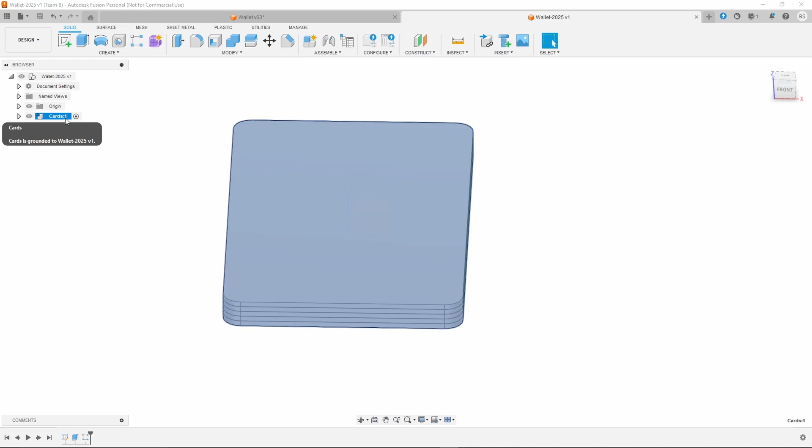You'll notice in Fusion 360 when a component is selected with a radio button, it looks solid. But when it's not selected and there's another component that's been selected, it's semi-transparent. That's to tell you visually that you're not editing that particular object or affecting it very much, but you can still use it.

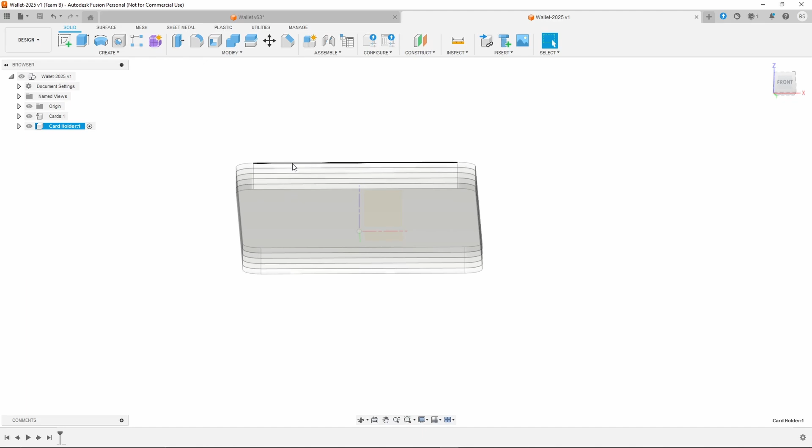So for instance, here's the cards that I'm going to make that's going to fit my card holder. And so I can design around it by selecting one of the surfaces of the card. See how it's got this little hashtag underneath it, means it's been selected. And so when I go and sketch on it, but I'm doing it in card holder, I'm actually using another component to draw a new component with.

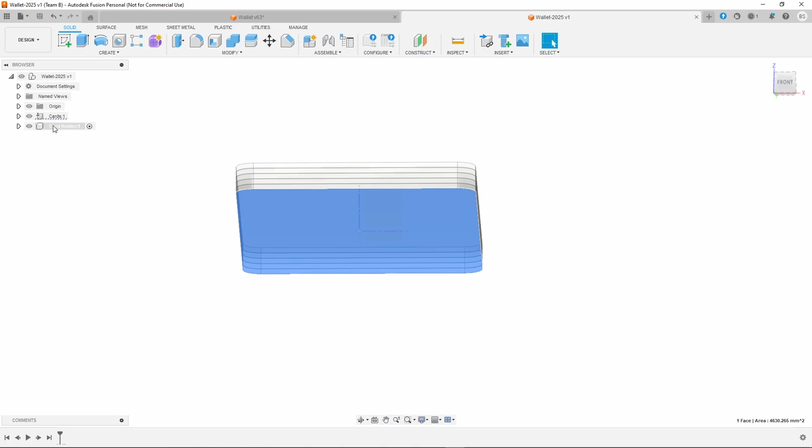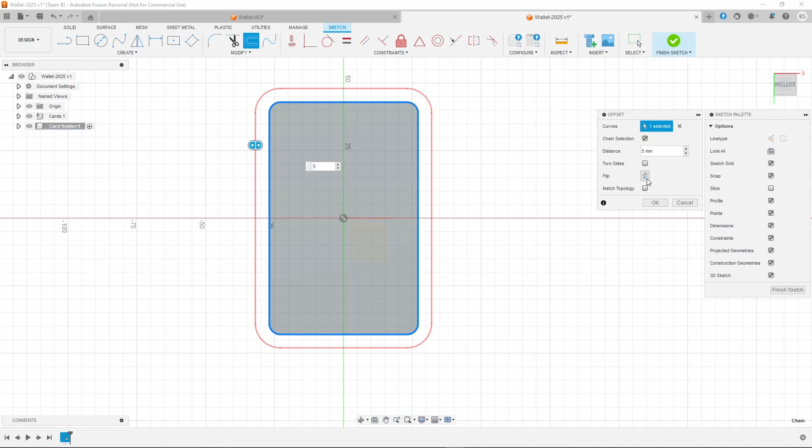So then I'm drawing on this surface, and I love this feature, it's called offset. So I can offset the edge of the feature, let's say by 1 millimeter, or let's do 5 millimeters. And so by doing that, I'm selecting the edge I want to offset, and by how much, and then that red line is where the new line is going to be drawn when I hit OK.

So now, if I finish this, if I extrude this object, I'm extruding a shape around the cards that will exactly fit the cards. And another neat feature when you do extrude is if you select the layer that you want, the surface you want it to extrude to, it'll automatically pop to that height.

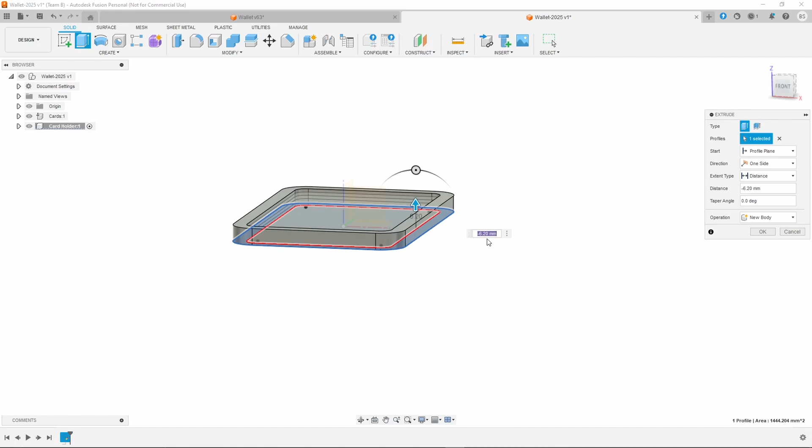So 6.2 millimeters is the height of those 5 cards. I hit OK, and now I have an object around the cards. If I hide the cards, I can see I've just made an object that perfectly fits all those cards.